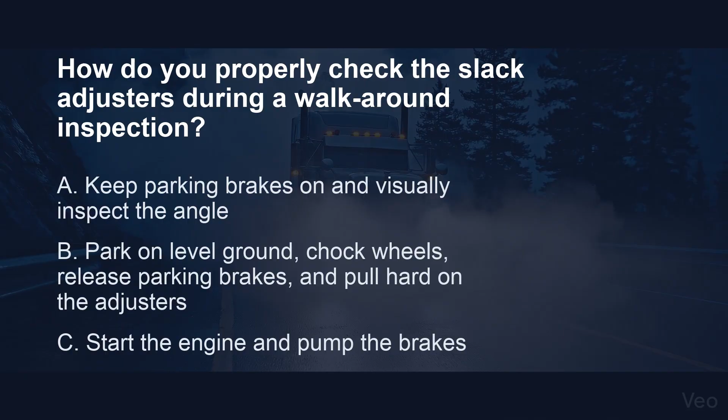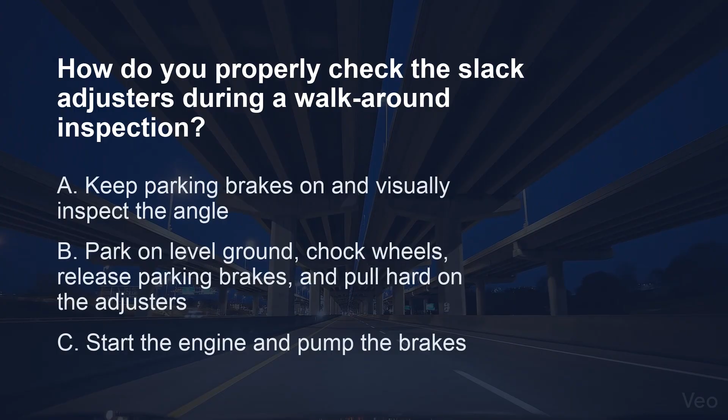Question 2. How do you properly check the slack adjusters during a walk-around inspection? Option A. Keep parking brakes on and visually inspect the angle. Option B. Park on level ground, chock wheels, release parking brakes, and pull hard on the adjusters. Option C. Start the engine and pump the brakes.

The correct answer is B. Park on level ground, chock wheels, release parking brakes, and pull hard on the adjusters. Getting under the rig safely to check slack adjusters requires you to park on level ground, chock the wheels, release the parking brakes, and pull hard on them with gloves.

Question 3. Where are the brake drums located on a heavy-duty commercial vehicle? Option A. In the center of the drive shaft. Option B. On each end of the vehicle's axles. Option C. Next to the air compressor.

The correct answer is B. On each end of the vehicle's axles. Performing a visual check under the rig reveals that the brake drums are located directly on each end of the vehicle's axles.

Question 4. If the air compressor has its own oil supply, when should you check the oil level? Option A. At the end of every trip. Option B. Before driving. Option C. Once a week.

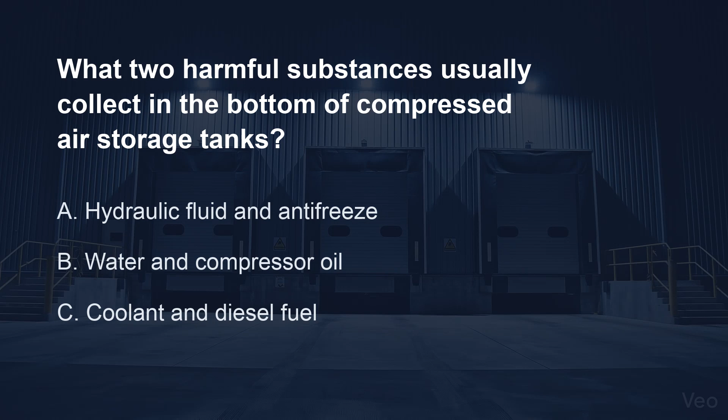Question 16. What two harmful substances usually collect in the bottom of compressed air storage tanks? Option A. Hydraulic fluid and antifreeze. Option B. Water and compressor oil. Option C. Coolant and diesel fuel.

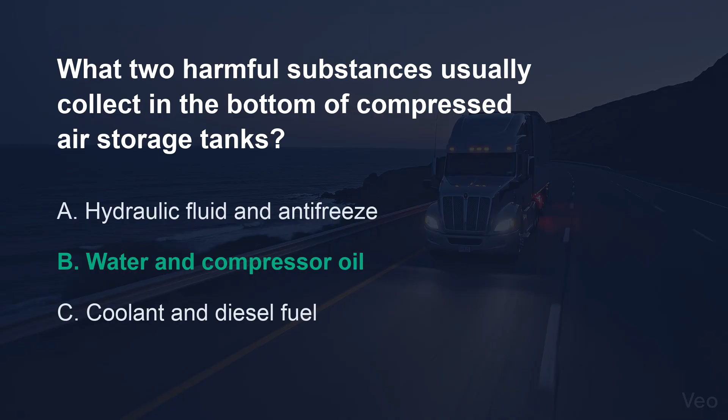The correct answer is B. Water and compressor oil. Bleeding your tanks daily is crucial because compressed air naturally introduces water and compressor oil, which collect in the bottom and are bad for the system.

Question 17. Be careful here. This is a very challenging question. At 55 miles per hour under good conditions, what is the approximate total stopping distance for an average driver in an air brake vehicle? Option A. Over 450 feet. Option B. Around 300 feet. Option C. Exactly 216 feet.

The correct answer is A. Over 450 feet. Cruising at highway speeds of 55 miles per hour means you must account for perception, reaction, brake lag, and braking distance, making the total stopping distance over 450 feet.

Question 18. Heads up. This is one of the hardest questions on the test. When driving a straight truck or combination with working ABS on all axles during an emergency stop, what can you do? Option A. Pump the brakes rapidly. Option B. Use stab braking. Option C. Fully apply the brakes.

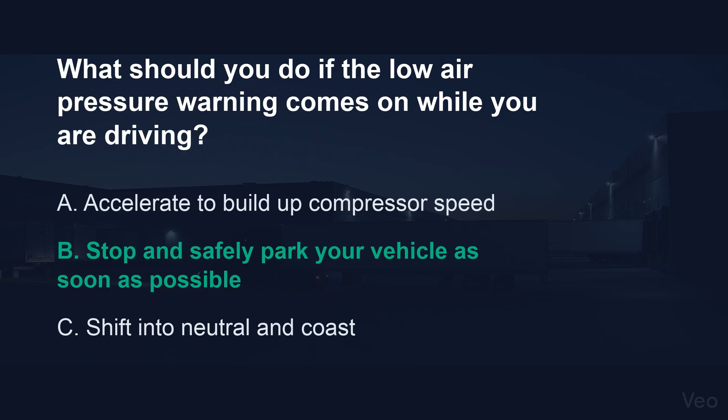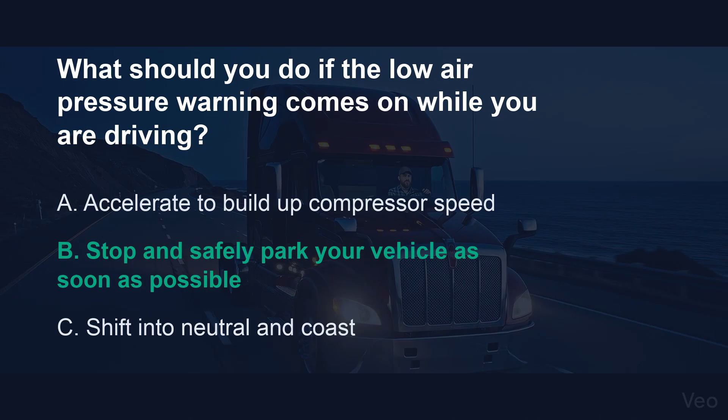The correct answer is B. Stop and safely park your vehicle as soon as possible. Hearing the low air buzzer on the highway means you must safely park your vehicle right away while you still have enough air in the tanks to use the foot brakes.

Question 22. Stay alert. This is a highly deceptive question. During the static air leakage test, engine off, what must be done with the parking brakes? Option A. They must be fully applied. Option B. They must be released, pushed in. Option C. They must be set to the modulating position.

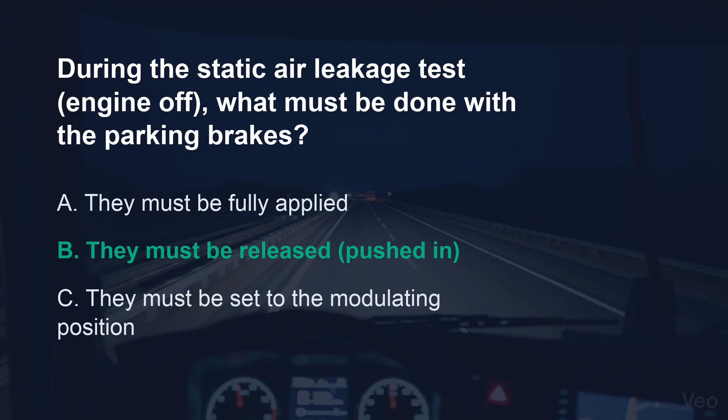The correct answer is B. They must be released, pushed in. Timing the initial pressure drop requires the system to be open, meaning you must release the parking brakes by pushing the control knob in. Question 23.

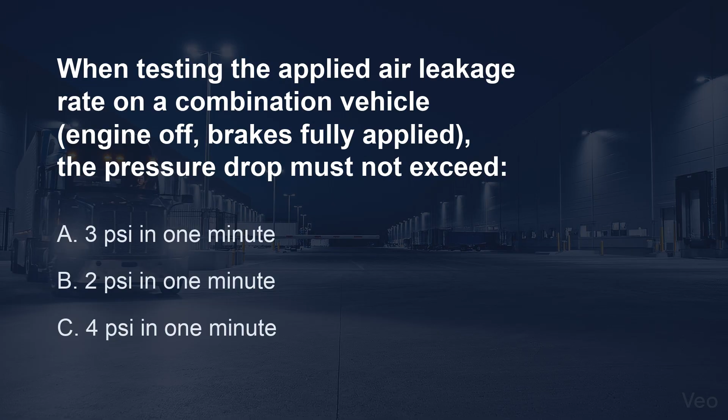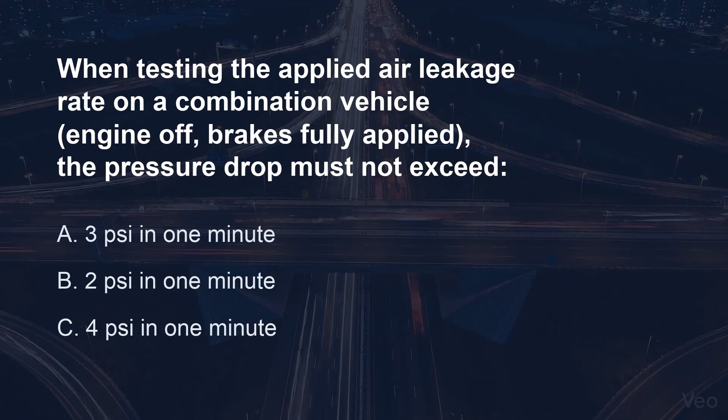Be careful. The choices here are very misleading. When testing the applied air leakage rate on a combination vehicle, engine off, brakes fully applied, the pressure drop must not exceed: Option A. 3 psi in 1 minute. Option B. 2 psi in 1 minute. Option C. 4 psi in 1 minute.

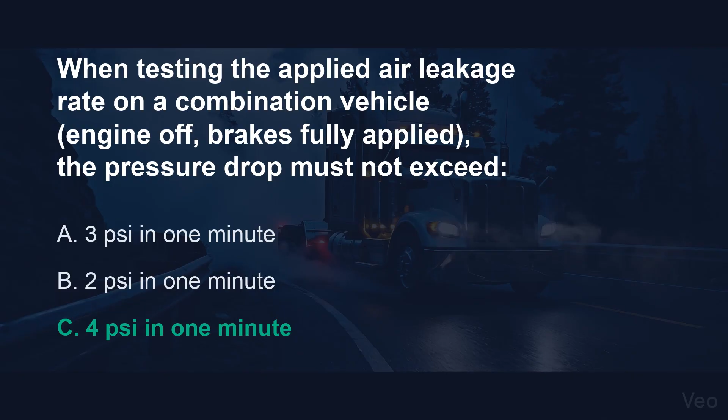The correct answer is C. 4 psi in 1 minute. Holding the foot pedal down firmly in a tractor-trailer rig requires checking the gauge to ensure the pressure does not drop more than 4 pounds in 1 minute.

Question 24. At what pressure will the air compressor governor typically stop pumping air? Option A. 100 psi. Option B. 150 psi. Option C. Around 125 psi.

The correct answer is C. Around 125 psi. When monitoring your dash gauges, you will notice the governor stops the compressor from pumping when the tank pressure reaches the cutout level of around 125 psi. Question 25.

Get ready. This one requires your full focus. In a dual air system, how long should it take for air pressure to build from 85 to 100 psi at operating RPMs? Option A. Within 3 minutes. Option B. Within 45 seconds. Option C. Within 60 seconds.

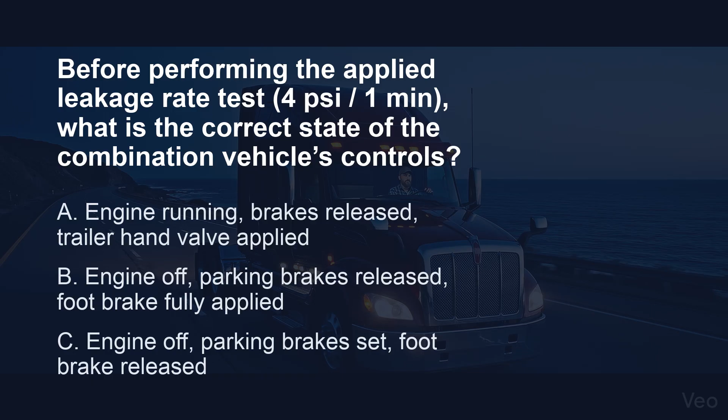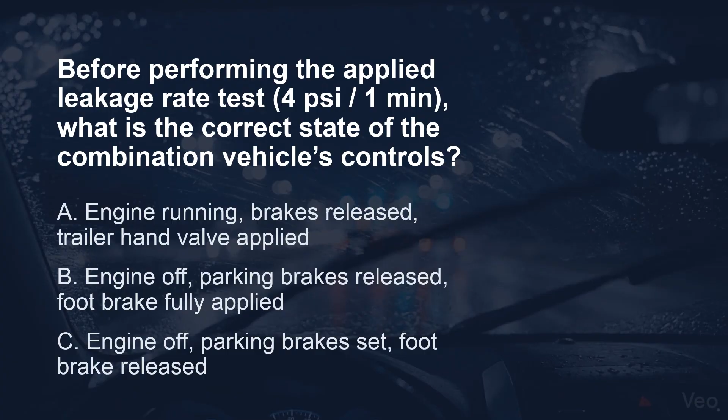Turn up the volume. You don't want to miss this detail. Before performing the applied leakage rate test, 4 psi/1 minute, what is the correct state of the combination vehicle's controls? Option A. Engine running, brakes released, trailer hand valve applied. Option B. Engine off, parking brakes released, foot brake fully applied. Option C. Engine off, parking brakes set, foot brake released.

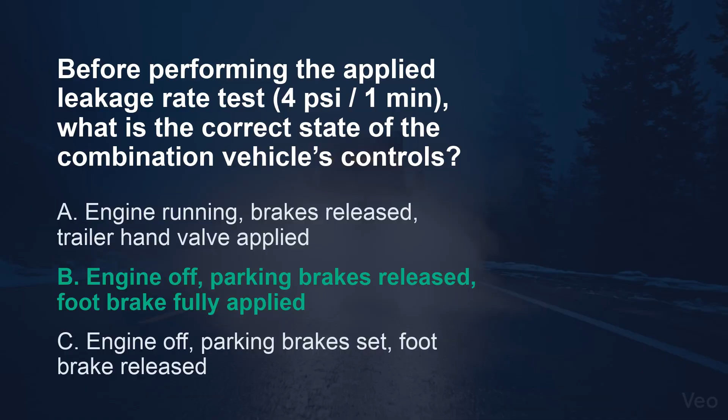The correct answer is B. Engine off, parking brakes released, foot brake fully applied. Checking a tractor-trailer for air leaks requires you to shut off the engine, release the parking brakes, and hold the foot brake fully applied for 1 minute. Question 29.

Watch your step. They are trying to fool you here. What component drops a mechanical arm into your view when the system pressure falls below 55 psi? Option A. Slack adjuster. Option B. Wig-wag. Option C. Tractor protection valve.

The correct answer is B. Wig-wag. Driving an older commercial vehicle, you might encounter a wig-wag device that visually alerts you by dropping an arm when pressure drops below 55 psi. Question 30.

This next question is tough. Stay focused. How many sets of brake controls does a driver use to operate a dual air brake system? Option A. A single set of brake controls. Option B. 2 separate foot pedals. Option C. 1 for the tractor and a hand valve for the trailer.

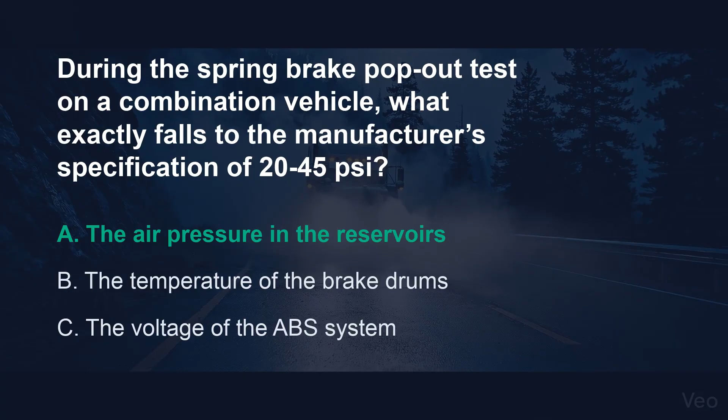The correct answer is A. The air pressure in the reservoirs. Fanning the foot pedal depletes the stored air, and when the air pressure falls to 20 to 45 psi, the tractor protection and parking valves should close.

Question 32. Focus here. This is a high-fail question. How do automatic air tanks prevent their automatic drain valves from freezing in cold weather? Option A. They are equipped with electric heating devices. Option B. They circulate hot engine oil around the valves. Option C. They require the driver to add antifreeze daily.

The correct answer is A. They are equipped with electric heating devices. Driving in sub-zero temperatures is safer when automatic air tanks are equipped with electric heating devices that prevent the drain mechanisms from freezing. Question 33.

Stay sharp. You'll need to think about this one. Should you manually adjust an automatic slack adjuster to bring it within legal limits as a routine fix? Option A. Yes, it is recommended to do this daily. Option B. No, it generally masks a mechanical problem and is not fixing it. Option C. Yes, if the pushrod stroke exceeds the limit.

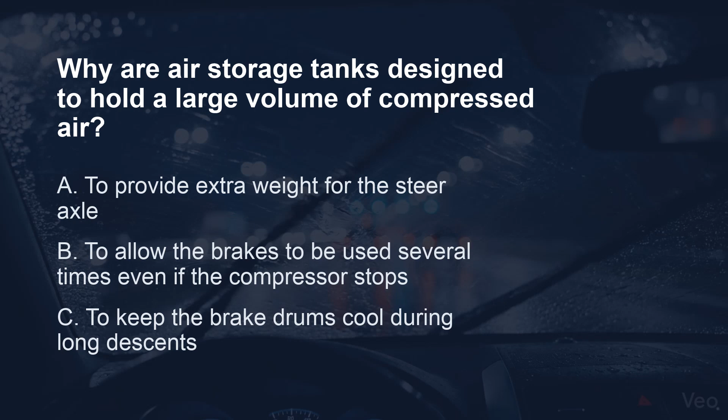Why are air storage tanks designed to hold a large volume of compressed air? Option A. To provide extra weight for the steer axle. Option B. To allow the brakes to be used several times even if the compressor stops. Option C. To keep the brake drums cool during long descents.

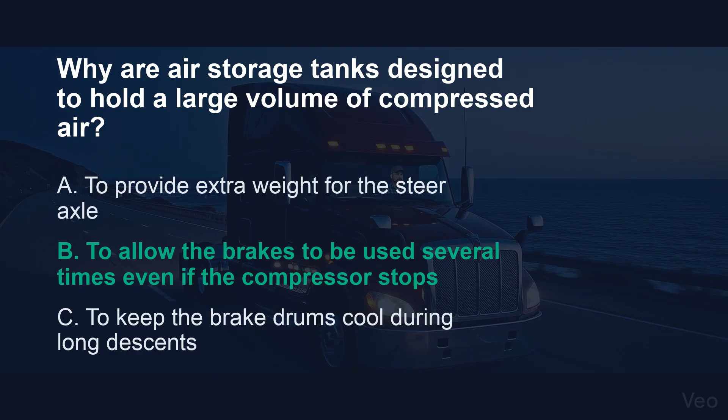The correct answer is B. To allow the brakes to be used several times even if the compressor stops. Losing your compressor on the highway is dangerous, but the storage tanks hold enough compressed air to allow you to apply the brakes safely multiple times. Question 35.

Get ready. This one requires your full focus. How do you correctly perform a test to ensure the parking brake will securely hold the vehicle? Option A. Stop, put the parking brake on, and gently pull against it in a low gear. Option B. Apply the foot pedal firmly while parked on a hill. Option C. Pull the trailer hand valve while moving forward at 5 miles per hour.

The correct answer is A. Stop, put the parking brake on, and gently pull against it in a low gear. Verifying the holding power of the spring brakes requires you to stop, apply the parking brake, and gently pull against it in a low gear.

Question 36. Why were front brake limiting valves installed on pre-1975 commercial vehicles? Option A. To reduce the chance of the front wheels skidding on slippery surfaces. Option B. To increase the longevity of the front brake pads. Option C. To provide extra air to the rear spring brakes.

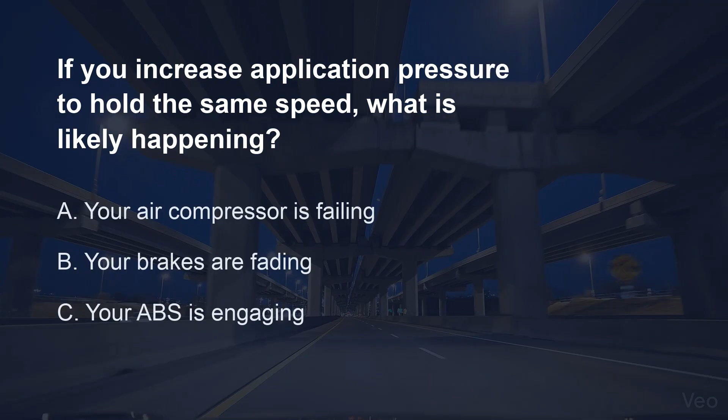Question 44. Trap alert. Listen to every single word. If you increase application pressure to hold the same speed, what is likely happening? Option A. Your air compressor is failing. Option B. Your brakes are fading. Option C. Your ABS is engaging.

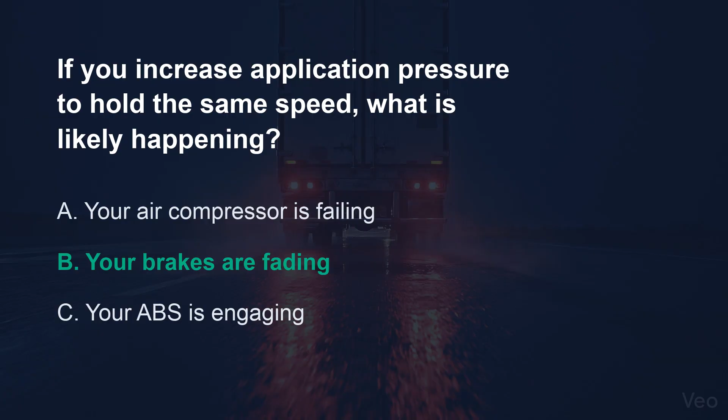The correct answer is B. Your brakes are fading. Noticing that you must push the pedal harder just to maintain your downhill speed is a clear sign that your brakes are fading. Question 45.

Focus up. This is a complex scenario. In a dual air system, how long should it take for air pressure to build from 85 to 100 psi at operating RPMs? Option A. Within 3 minutes. Option B. Within 45 seconds. Option C. Within 60 seconds.

The correct answer is B. Within 45 seconds. Checking the rate of air pressure buildup requires revving the engine to operating RPMs to verify the pressure climbs from 85 to 100 psi within 45 seconds.

Question 46. How do you test the parking brake? Option A. Drive at 5 miles per hour and apply the hand valve. Option B. Stop the vehicle, put the parking brake on, and gently pull against it in a low gear. Option C. Apply the foot pedal as hard as you can while stopped.

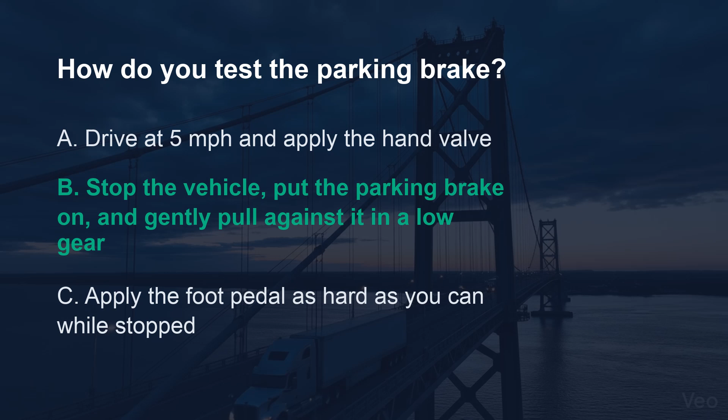The correct answer is B. Stop the vehicle, put the parking brake on, and gently pull against it in a low gear. Ensuring your rig won't roll away involves setting the parking brake and gently tugging against it in a low gear to confirm it holds. Question 47.

Heads up. This is one of the hardest questions on the test. In a dual air system, if the low pressure warning fails and air is lost, what kind of braking is available before the spring brakes apply? Option A. Only limited braking can be done. Option B. Full hydraulic braking takes over. Option C. No braking is possible.

The correct answer is A. Only limited braking can be done. Relying on a faulty warning system in a dual-circuit truck means stopping distance will increase, and only limited braking can be done before the springs engage.

Question 48. What must you do before starting down a hill to ensure safe braking? Option A. Turn off the engine brake. Option B. Be in the proper low gear. Option C. Pump the brakes to build maximum pressure.